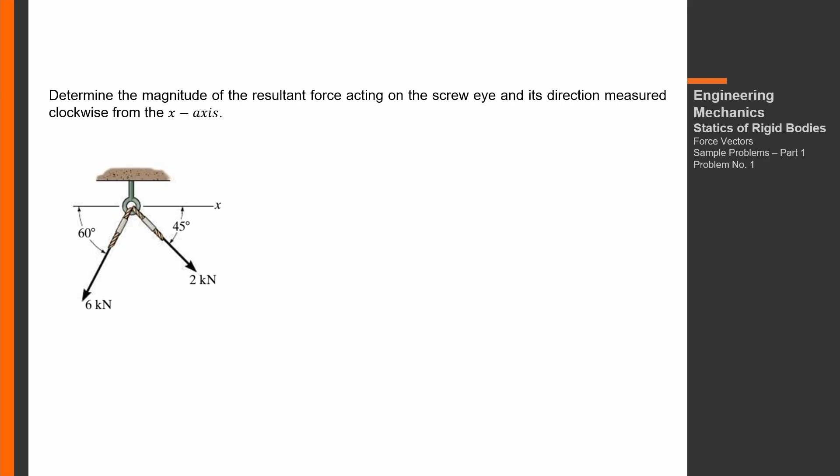So here is our figure. We have a 6 kN force measured 60 degrees counterclockwise from the x-axis, and a 2 kN force measured 45 degrees clockwise from the x-axis. Let's draw this.

Using the triangle law, this is what it looks like, drawn to scale. The head of the 6 kN force connects to the tail of the 2 kN force. The resultant goes from the tail of the first vector, the 6 kN, to the head of the second vector. We denote this as R, the resultant.

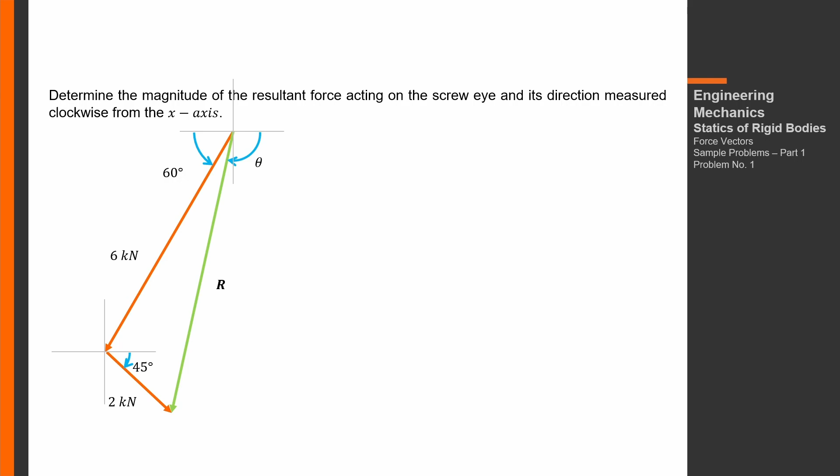The direction we need is measured clockwise from the x-axis, which I'll denote as theta. So we need the interior angles.

The angle opposite R, the resultant, I'll denote as phi. The angle opposite the 2 kN force I'll denote as beta. We'll use beta to get theta, and phi to apply the sine law and cosine law, whichever is more applicable.

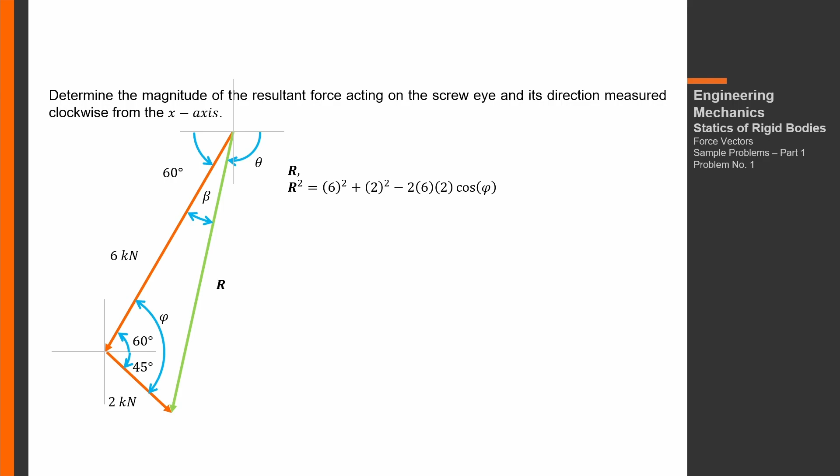Since it's an alternate angle, 60 degrees also comprises part of angle phi. Therefore, angle phi equals 60 degrees plus 45 degrees, so 105 degrees.

Substituting into the cosine law equation: square root of 6 squared plus 2 squared minus 2 times 6 times 2 cosine 105. I'll store this as A. Therefore, R equals 6.7979 kN.

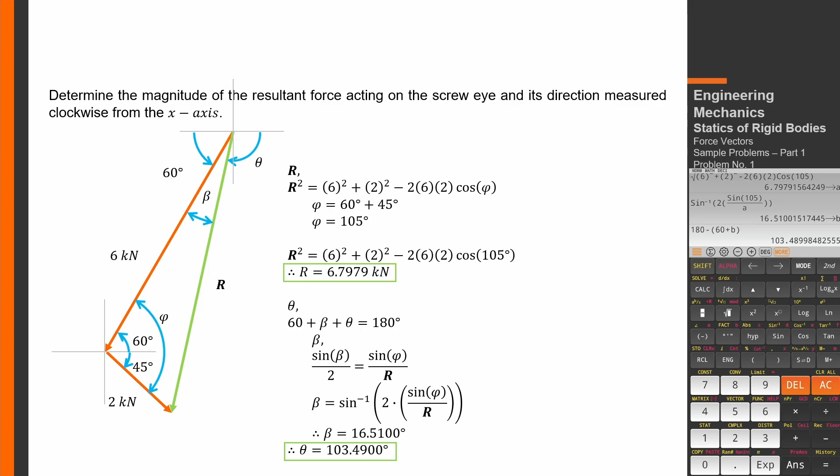Therefore, beta equals 16.51, which I'll store as B. Then 180 minus 60 plus B. So theta equals 103.48998, or 103.4900 degrees.

Problem number 2. Resolve the 30 Newton force into components along the U and V axis and determine the magnitude of each of these components.

So we resolve the 30 Newton force into components along the U and V axis. The force along the U axis is F sub U, and along the V axis is F sub V.

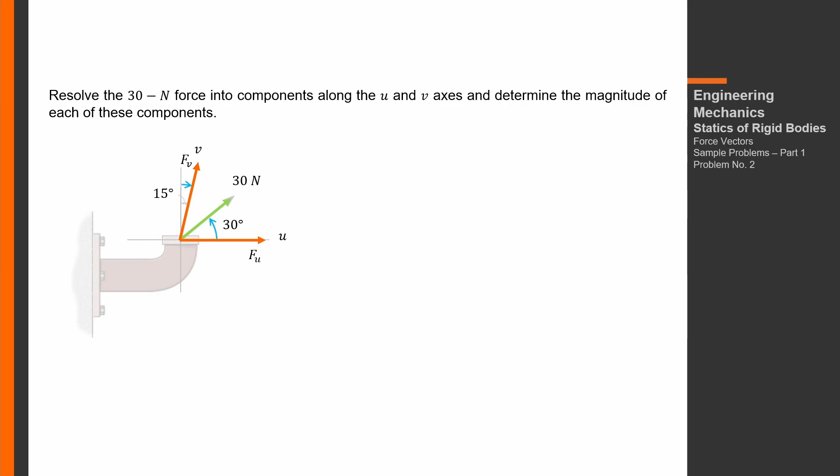This is 30 degrees measured from the U axis, and 15 degrees measured from the vertical axis, the V axis. Using the triangle law, this is what it looks like.

To get the unknowns, we take the interior angles so we can use the sine law or cosine law, whichever is more applicable. I'll denote this as alpha. The angle opposite the 30 Newton force is beta.

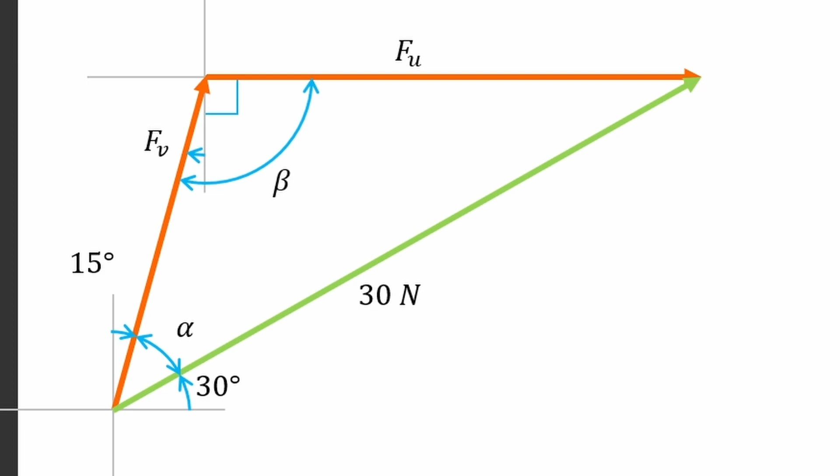We can get this, we have 90 degrees, then that angle. This is opposite F sub V, which I'll denote as gamma.

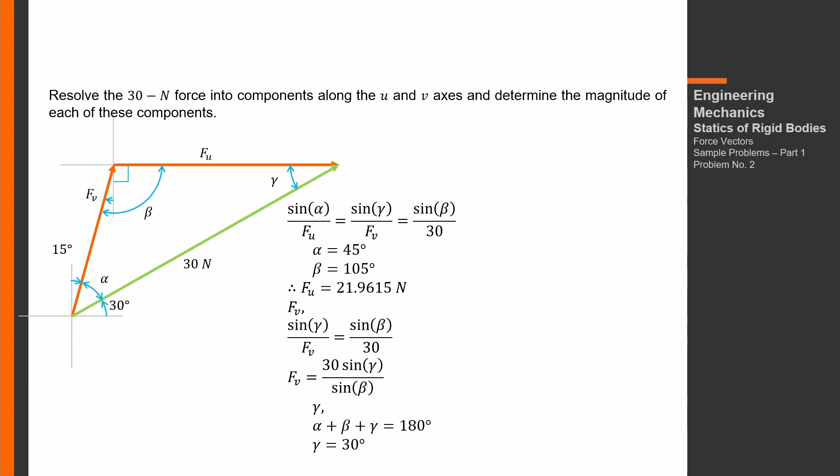For gamma, the total interior angle should be 180. We already have alpha and beta, so gamma is what's missing. Therefore, gamma is 30, since 45 plus 105 is 150, and 180 minus 150 is 30 degrees.

So, 30 sine 30 degrees over sine beta, which is 105. Therefore, F sub V is 15.5291 Newtons. These are the components along the U and V axis of the 30 Newton force.

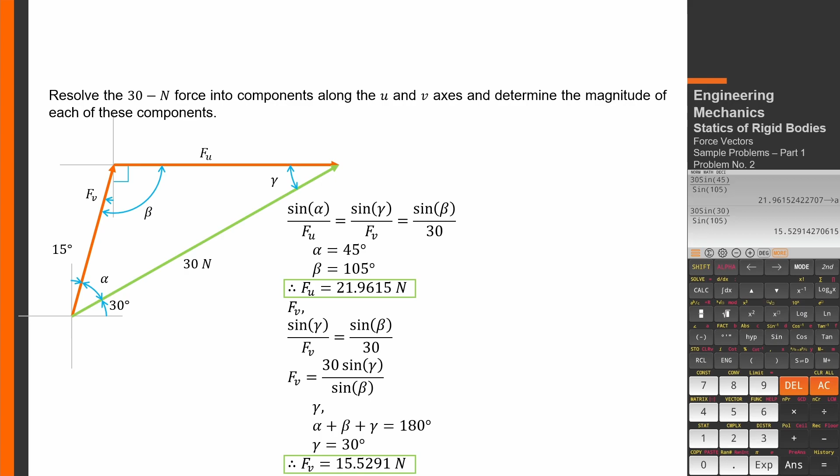Problem number 3. The force F is equal to 450 Newton acts on the frame. Resolve this force into components acting along members AB and AC and determine the magnitude of each component.

So drawing natin: 450 Newton, yung force along member AB, tapos yung force along member AC. May 45 degrees, tapos ito ay 30 degrees din, alternate angle nung nasa given. Ginawa kong ganito yung direction ng forces. Pwede mo ring itry kung opposite naman sila or tulad sila na nasa first quadrant or third quadrant.

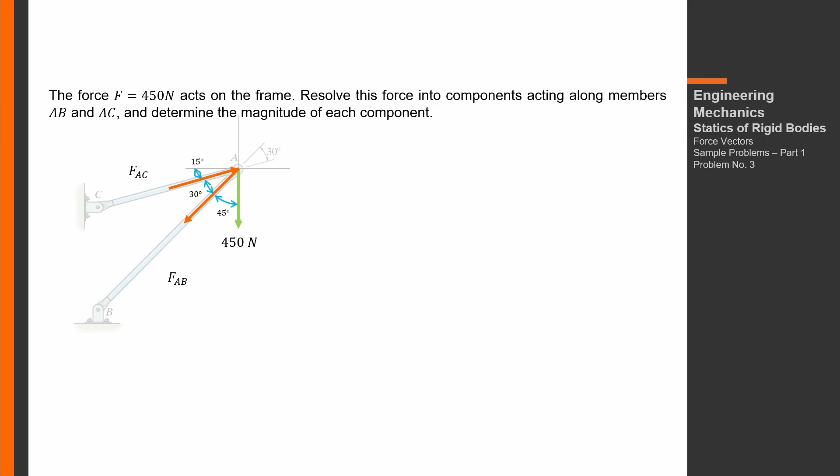Tapos ito yung 15 degrees, yung angle na to. Kapag ginawa natin siya as triangles, magiging ganito yung itsura niya. 450 Newton is vertically downward.

Ang magiging concept sa triangle law, yung force AC, i-connect natin sa force AB, tapos yung resultant nila, mula dun sa tail ng first vector, papunta dun sa head ng succeeding or yung second vector dito. Pag in-arrange natin din yung angles, ganito yung magiging itsura nun.

Dahil given ulit tayo ng interior angles, makompute natin yung angle opposite ng FAB, so yun yung 90 plus 15. Sine 30 over 450 is equal to sine 90 plus 15 over FAB is equal to sine 45 over FAC. Pwede na natin itong isolve.

So FAB, in-arrange lang ito. Na-multiply lang natin both sides by FAB, tapos divide both sides by sine 30.

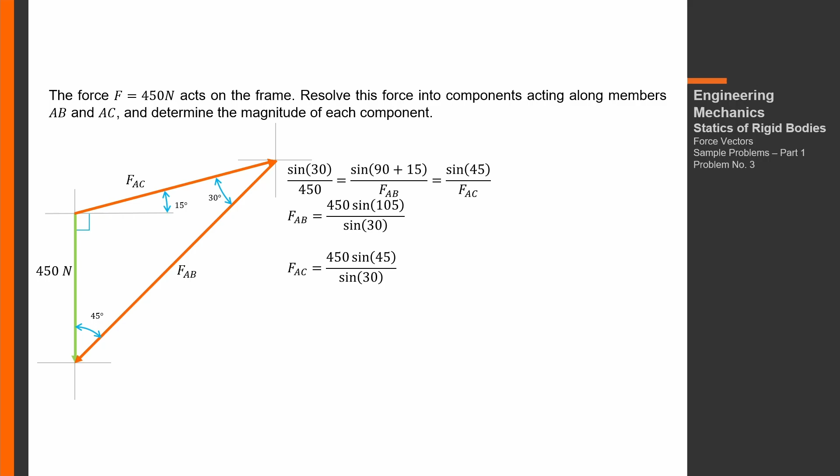Tapos yung FAC, ganun din. Yung magkasamang sine 30 over 450 tsaka sine 45 over FAC. Multiply both sides sa FAC tsaka 450, tapos divide both sides by sine 30.

So solve natin: 450 sine 105 over sine 30. Tapos yung isa pa: 450 sine 45 over sine 30.

Therefore, force along AB is 869.3332, force along AC is 636.3961 newtons. So ito yung mga sagot natin.

Yung ginawa ko sa calculator, may display function yon, yung para sunod-sunod yung magiging sagot, para isang tuloy-tuloy na input na lang sa calcu, yung colon.

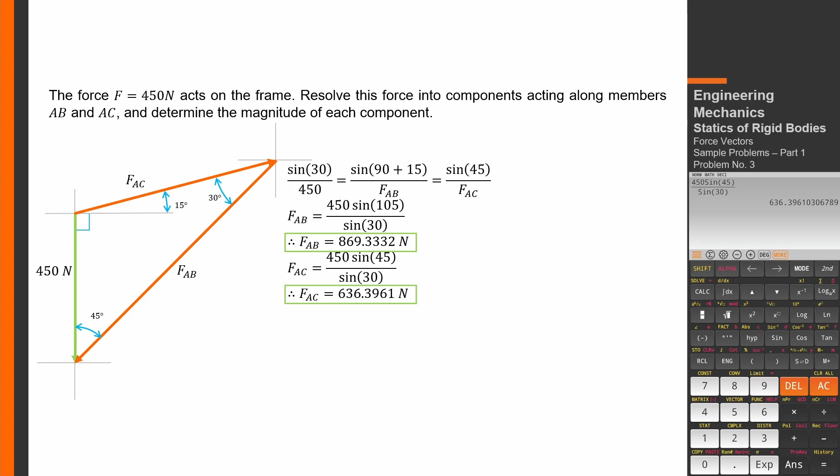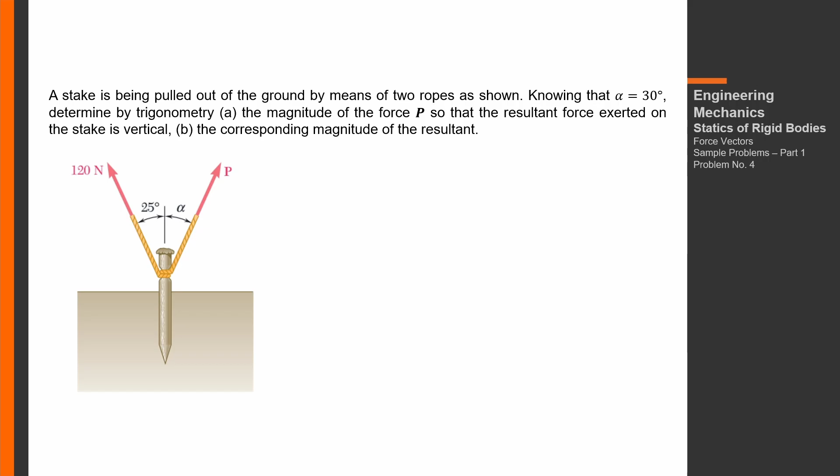Problem number 4. A stake is being pulled out of the ground by means of two ropes as shown. Knowing that alpha is equal to 30 degrees, determine by trigonometry first the magnitude of the force P so that the resultant force exerted on the stake is vertical, and next the corresponding magnitude of that resultant.

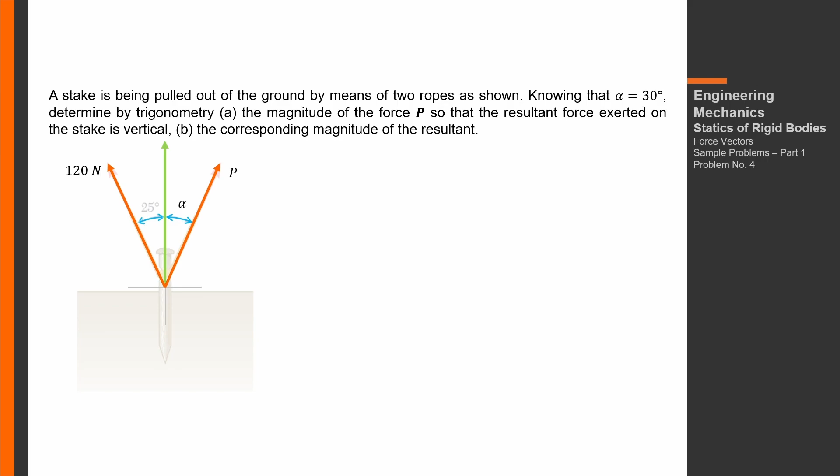So drawing natin, ito yung resultant, so vertical, tapos force P, tapos yung force na given na 120. Yung alpha na sabi sa given 30 degrees, tapos yung 25 degrees measured from the vertical. Pag in-arrange natin sila para maging triangle, ganito yung magiging itsura.

Pwede nyo siyang i-drawing graphically. First, pwedeng yung vertical axis muna in which dun yung line of action ng resultant. Tapos measure ka ng 25 degrees from the vertical. So yun naman yung 120 Newton force. Pwedeng i-scale mo yung pagdodrawing.

Tapos dun sa end or sa head ng 120 Newton force, measure ka naman from the vertical yung given na angle alpha which is 30 degrees, tapos kung saan mag-intersect yung line na yon, tsaka yung vertical resultant, so yun yung magnitude ng force P. Tapos pwede mo ring sukatin yung para sa resultant tsaka yung magnitude ng force P.

So yung resultant, denote na lang natin as R, solve natin to analytically. Para makuha natin yung mga interior angles, lagyan natin to, 25 degrees din to dahil dun sa alternate angle siya. Tapos yung opposite angle ng R, denote ko na lang as phi. Tapos opposite ng 120 Newton force, which yung angle alpha din dahil opposite or alternate angle, so 30 degrees.

Pwede natin ulit siya makuha using sine law: sine 25 over P, tapos sine phi over R is equal to sine 30 over 120. So P is equal to, isolate natin yung equation na sine 25 over P tsaka yung sine 30 over 120, multiply both sides sa P times 120 tapos divide both sides sa sine 30.

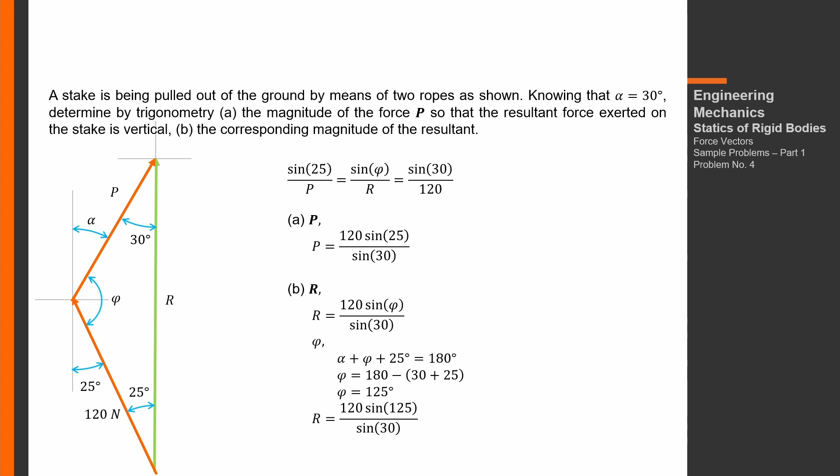Therefore R is equal to, yung value ng resultant, 120 sine 125 over sine 30. Solve natin: 120 sine 25 over sine 30 para dun sa force P, tapos 120 sine 125 over sine 30 para dun sa resultant R.

Therefore, force P is 101.42838, tapos yung sa R, 196.59649062936. So therefore, magnitude ng force P is 101.4284, tapos yung resultant R is 196.5965 newtons.